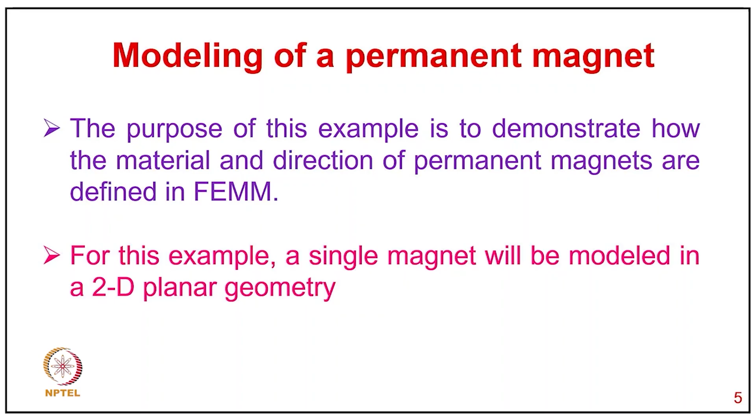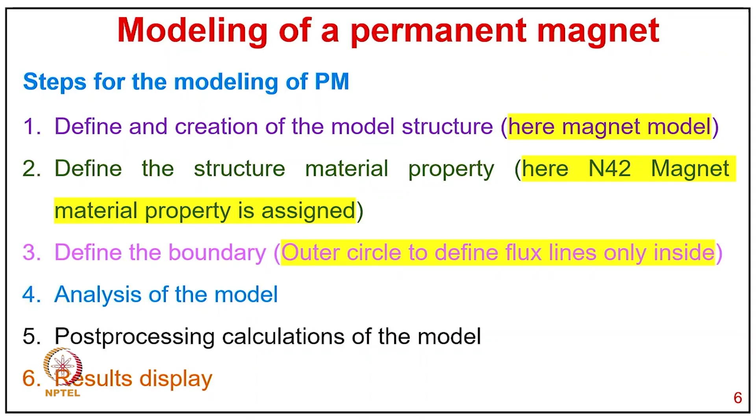Now, steps for the modeling of the magnet: define and create the model structure, here the magnet model; define the material properties, like here N42 magnet material properties assigned; define the boundary outer circle to keep flux lines only inside; analysis of the model; and post-processing calculation of the model and results display.

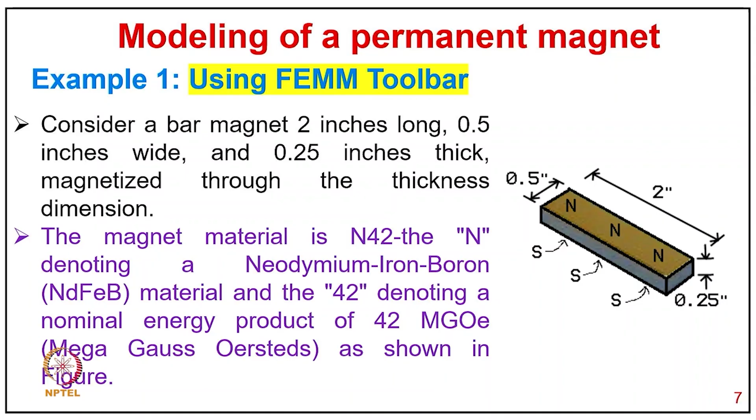So, coming to example 1, using the FEMM toolbar, consider a bar 2 inches long, 0.5 inch wide and 0.25 inch thick, as you can see in the diagram, magnetized through the thickness dimension. The magnet material is N42, N denoting neodymium iron boron, NdFeB material, and 42 denoting the nominal energy product of 42 MGOe, mega gauss oersteds, as shown in the figure.

The top side of the magnet is the N pole and the bottom side is the S pole face. The material model of most permanent magnets can be defined by knowing two quantities: the relative magnetic permeability and the coercivity of the magnet. So, now coming to modeling of a permanent magnet using the FEMM toolbox. Step 1 is problem definition, defined before defining the structure.

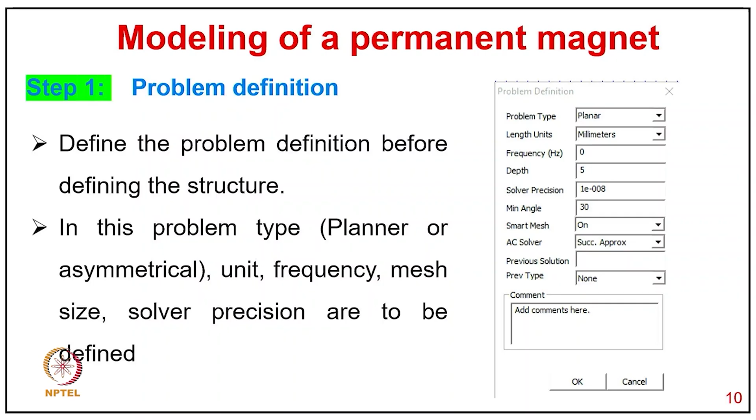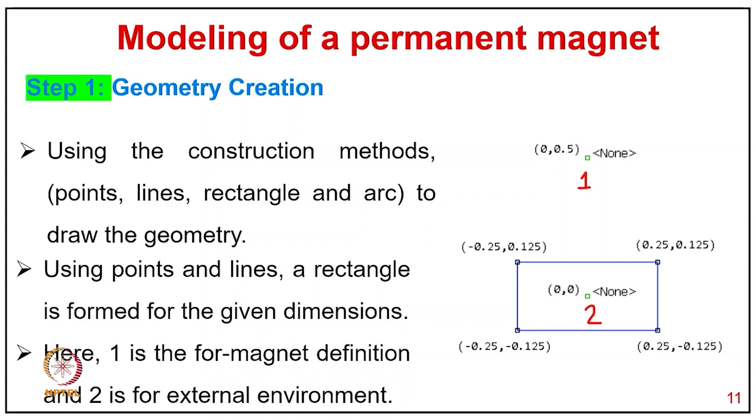In this, problem type planar or axisymmetric, unit, frequency, mesh size and solver precision are to be defined as given in the diagrams. Then step 1, geometry creation. Using the construction methods point, line, rectangle and arc to draw the geometry. As you can see in the diagram, using points and lines, a rectangle is formed for the given dimensions. Here 1 is for the magnet definition, 2 is for the external environment.

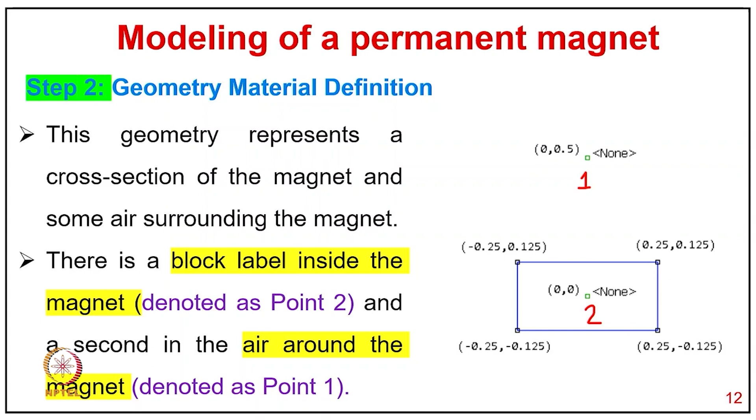So, step 2, geometry material definition. The geometry represents a cross section of the magnet and some air surrounding the magnet. There is a block label inside the magnet denoted as point 2, and the second is the air around the magnet denoted as point 1. Now, coming to part 2, geometry material definition. The material defined for the magnet is N42, as pictured in the figure.

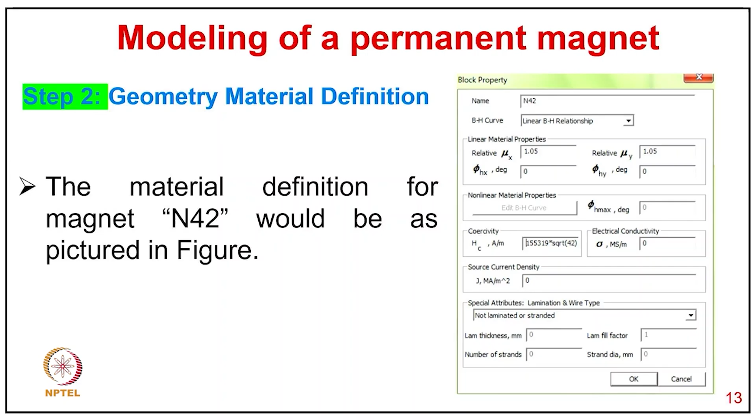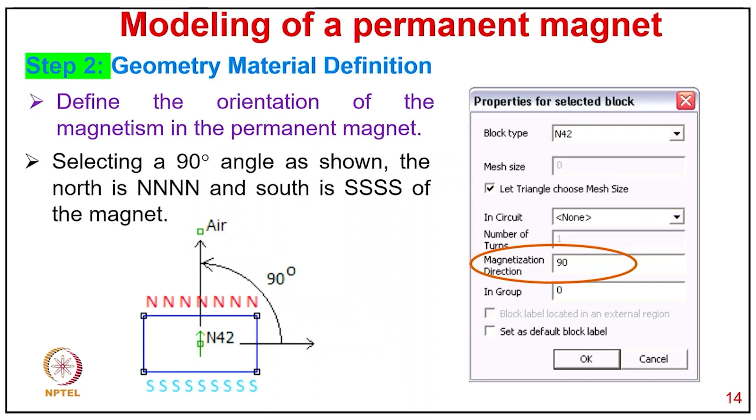Here you select N42, then linear relationship, then relative permeability mu x 1.05, then relative mu y 1.05. Similarly, you select other parameters like Hc in ampere per meter, which is given here as 155319 into square root of 42, and then you have different boxes. Now, in geometric material, define the orientation of magnetism in the permanent magnet by selecting a 90-degree angle as shown, with north NNN and south SSS of the magnet, as you can see in the figure.

Now, step 3 is the boundary definition. Define a boundary to analyze the model; the magnetic field is analyzed within the boundary, and the flux lines and flux density outside the boundary are 0. A circle is used for the boundary condition in planar problems. Now, step 4 is analysis of the model. The toolbar has the run analysis button to analyze the solution.

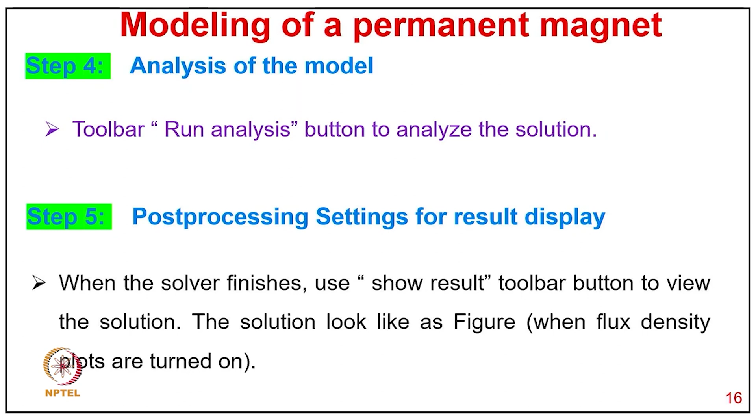Step 5, the post-processing setting and result display. When the solver finishes, use the show result toolbar button to view the solution, shown in the figure when flux density plots are turned on. And step 6 is result display. When the solver finishes, use the show result toolbar button to view the solution, as in the figure when flux density plots are turned on.

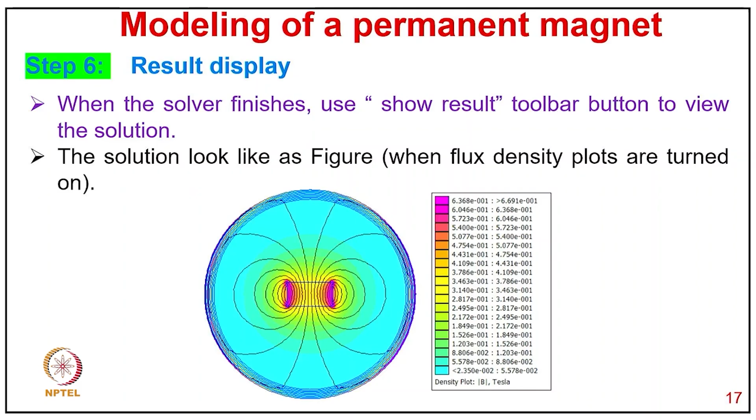So, now coming to modeling of a permanent magnet using a MATLAB script, example 2. A, model the permanent magnet shown in the figure using FEMM and MATLAB. B, plot the variation of flux density along the x-y axis of the magnet at a 0.1 millimeter gap from the magnet, as you can see in the figure.

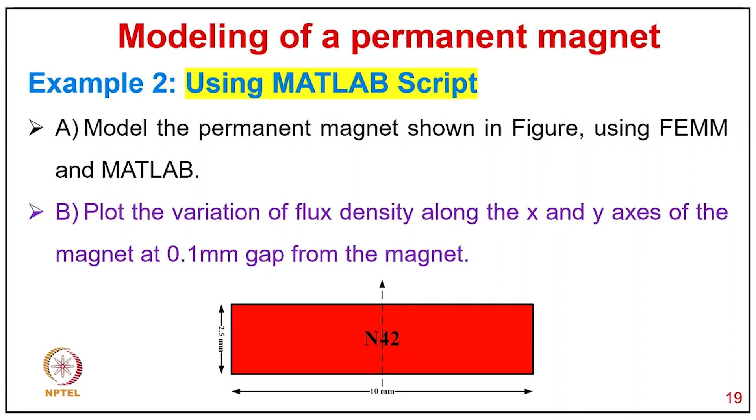Now, clc, clear, openfemm. Now, newdocument and mi_probdef: 0, millimeters, planar, and 1e-8, 0, 30, and the AC solver is not added.

So now typically using the construction methods, point, line, rectangle and arc, to draw the geometry. Here I draw a rectangle, 1,1; 11,3.5, for the magnet, and I draw an arc from 22.25, 2.25 to minus 12.25, 2.25, 180, 5 as the boundary arc, and then a second one from minus 12.25, 2.25 to 22.25, 2.25, 180, 5 as boundary arc 2, and then mi_zoomnatural.

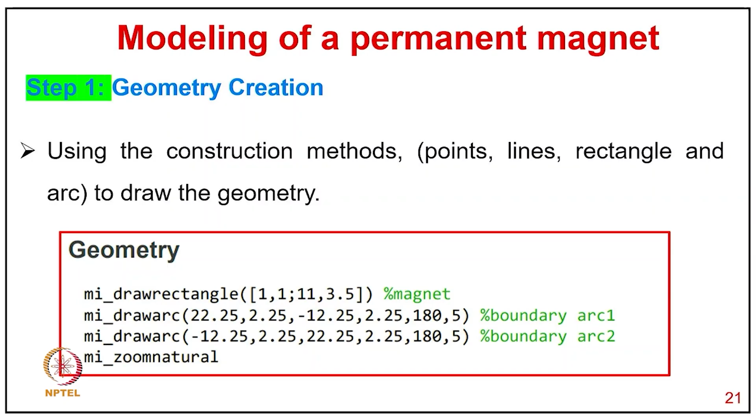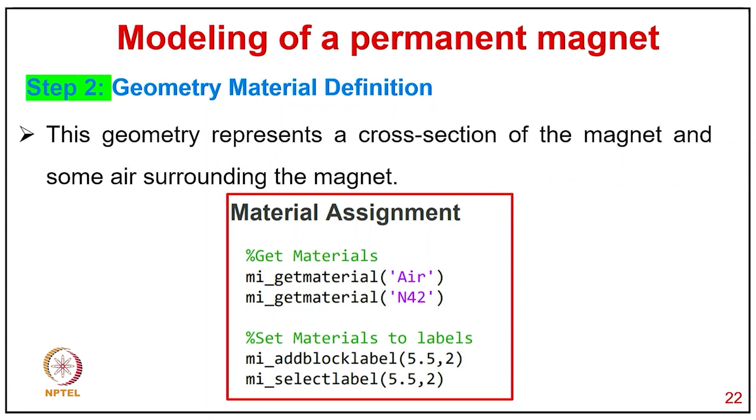So now coming to material definition. This geometry represents a cross section of the magnet and some air surrounding the magnet. So here material assignment is mi_getmaterial air and mi_getmaterial N42, and set material to label. So mi_addblocklabel 5.5, 2, mi_selectlabel 5.5, 2. Group 2 is the N42 magnet material and group 3 is the air material.

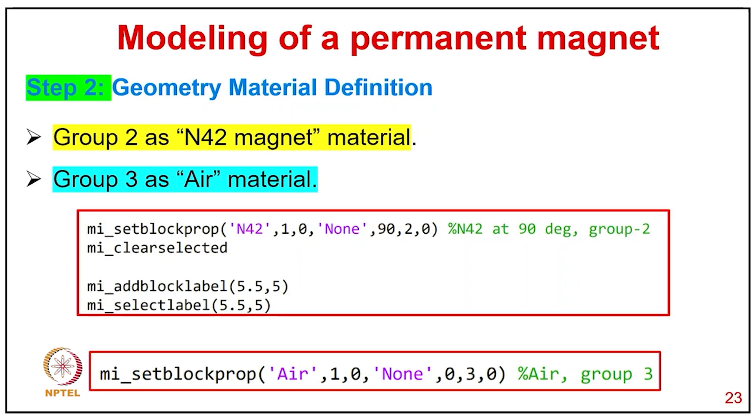Now mi_setblockprop N42, 1, 0, none, 90, 2, with the comment N42 at 90 degrees, group 2, mi_clearselected, and mi_addblocklabel 5.5, 5, mi_selectlabel 5.5, 5, and mi_setblockprop air, 1, 0, none, 0, 3, 0, with the comment air, group 3.

Now coming to step 3, boundary definition, to define a boundary to analyze the model. Magnetic flux analysis is within the boundary; the flux lines and flux density outside the boundary are 0. So the boundary assignment is mi_addboundprop air, 0, 0, 0, 0, 0, and mi_selectarcsegment 22.25, 2.25, mi_selectarcsegment minus 12.25, 2.25, and mi_setarcsegmentprop.

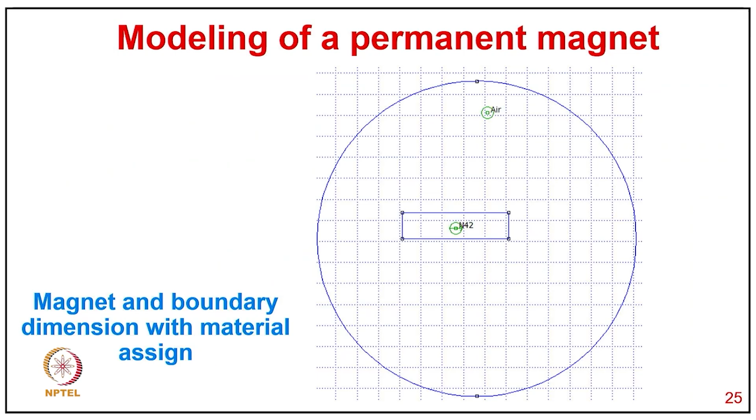So 5, air, 0, 1, and mi_clearselected, and you can see the magnet and boundary dimensions with material assignment, how the diagram looks, and then how the meshing of the structure looks.

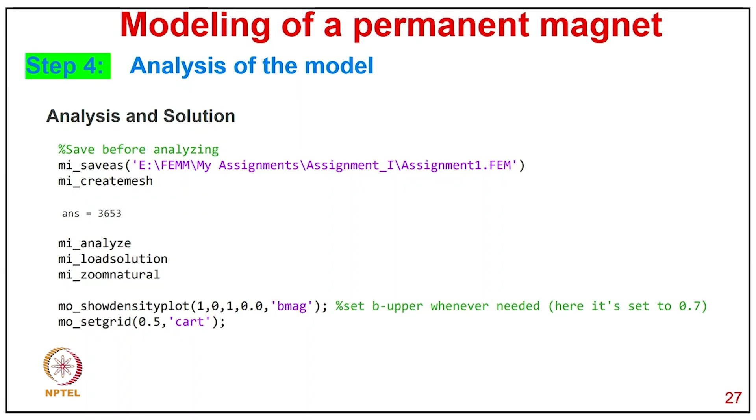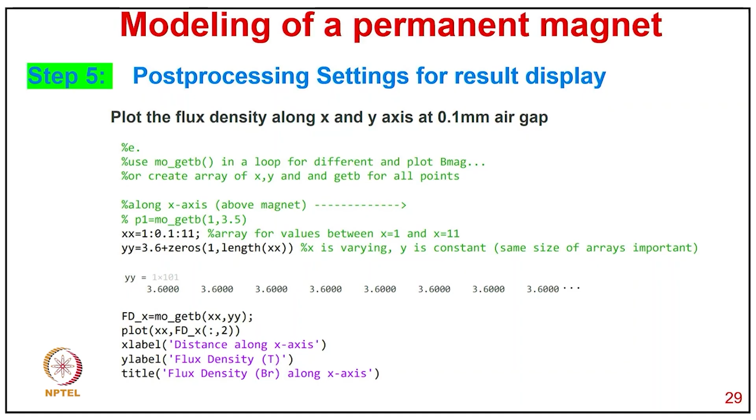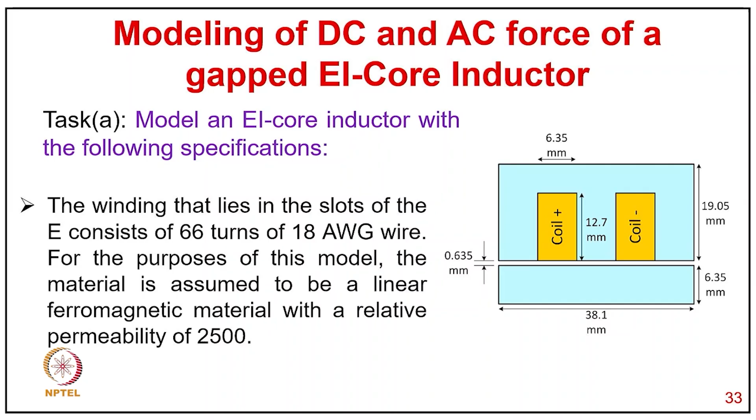Now coming to tutorial 2, DC and AC force of a gapped EI core inductor. Task A: model an EI core inductor with the following specification, as you can see in the diagram. The winding that lies in the slot of the E consists of 66 turns of 18 AWG wire. For the purposes of this model, the material is assumed to be a linear ferromagnetic material with a relative permeability of 2500. Task B is to present a table comparing calculated and simulated inductance, DC force and AC force.

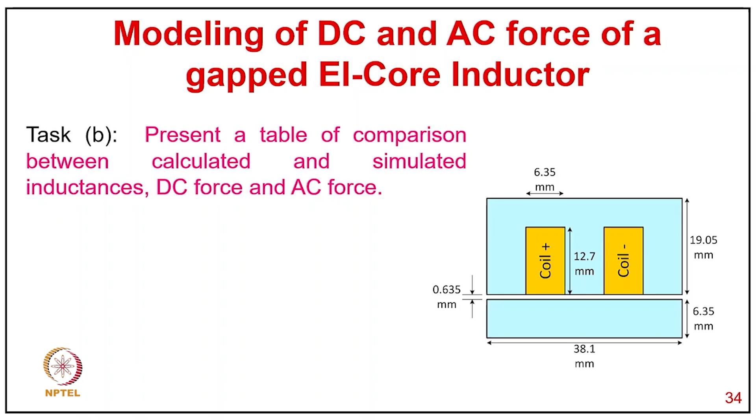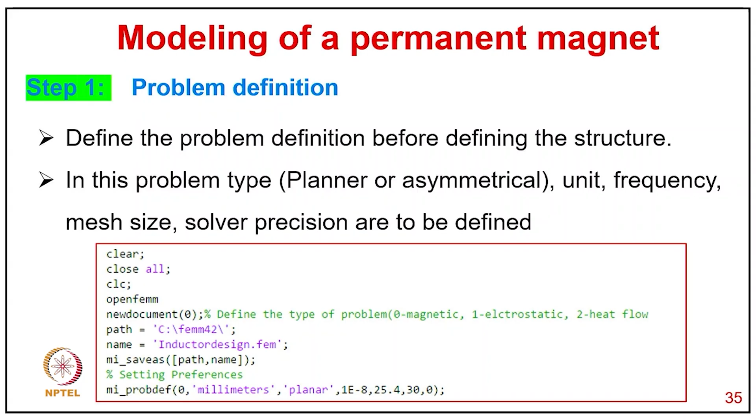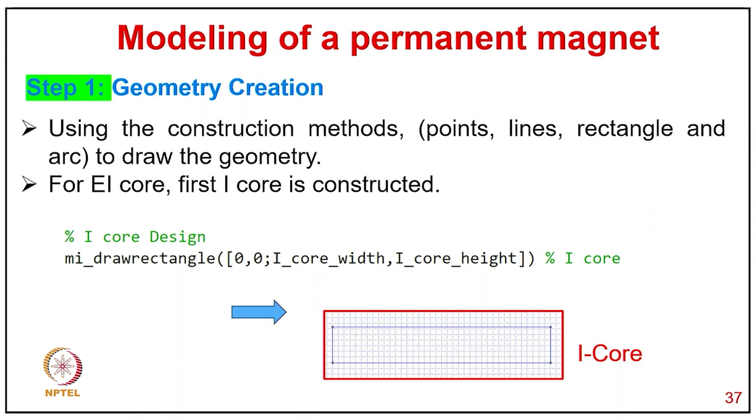And then using the construction methods, point and line, to draw the EI core. First the I core is to be constructed. You can see in the code how the I core is created here with the diagram.

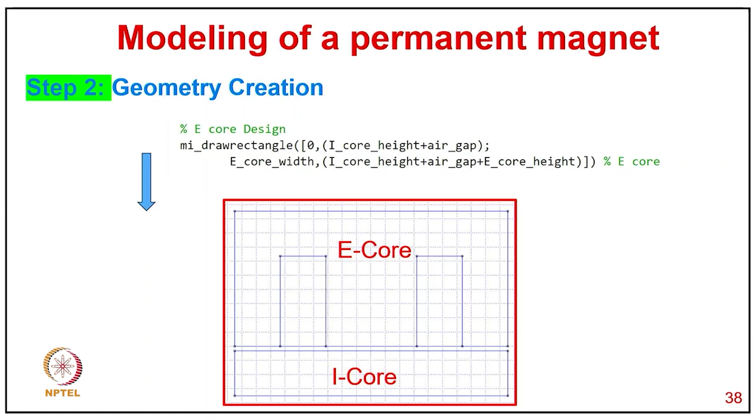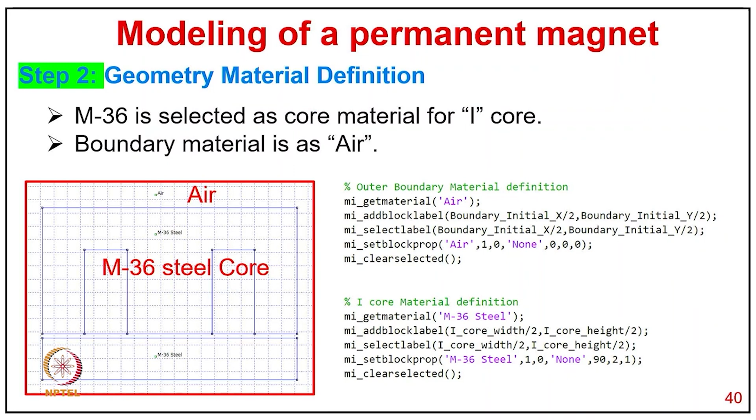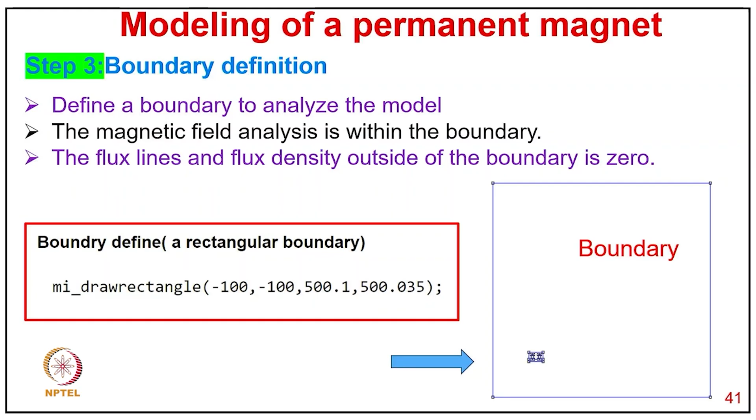So you can look into the diagram to see how it is shown, and the code is given here for doing this process. And third is the boundary definition, to define the boundary to analyze the model: the magnetic field analysis within the boundary, and the flux lines and flux density outside the boundary. So this is the boundary defined with the code, and how the boundary looks, of course, in the box.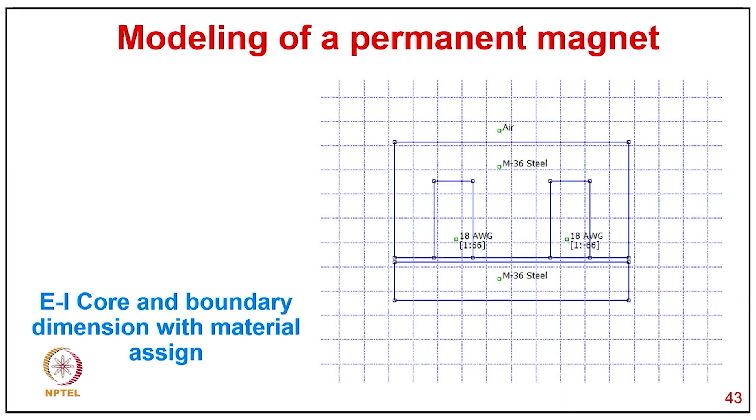And then step 3, circuit definition. Define the circuit for the excitation. So standard wire gauge 18 of 66 turns is used for excitation, and we add the circuit property. The code is given here, and you can see how coil 1 and coil 2 are shown with the geometry of the EI core. And then the EI core and boundary dimensions with the material assigned, as you can see in the diagram. And then the meshing of the structure of the EI core.

Now coming to the analytical reluctance calculation. Reluctance is equal to Lg upon 4π × 10^-7 × core depth × E core center pole width × 10^-3. Putting in the values, it comes to 3.133 × 10^6 per Weber, and L equals N² upon reluctance. So putting in the values, it comes to 1.39 millihenry.

Now coming to step 4, analyze the model. The flux linkage method calculation is the code of the model, the model and calculation of inductance using the code. And this is the code for analysis of the model, calculating inductance using field energy storage as a co-energy method for L calculation. And this is the flux lines with the leakage flux, and this is the flux density distribution. And then the inductance comes out as L equal to 1.769 millihenry.

And the results of inductance: first is the analytical calculation, 1.3 millihenry. The calculation using flux linkage FEMM is 1.796 millihenry, and the calculation using field energy comes to 1.801 millihenry.

Now coming to DC force calculation. If I assume that there is no leakage and fringing, and that the contribution of the iron sections to the reluctance of the magnetic circuit is trivial in comparison to the contribution of air, the force on the E core is described as F equal to mu 0 N² I² A divided by 4G², where A is the center pole width, N is the number of turns, I the current, and G the air gap length.

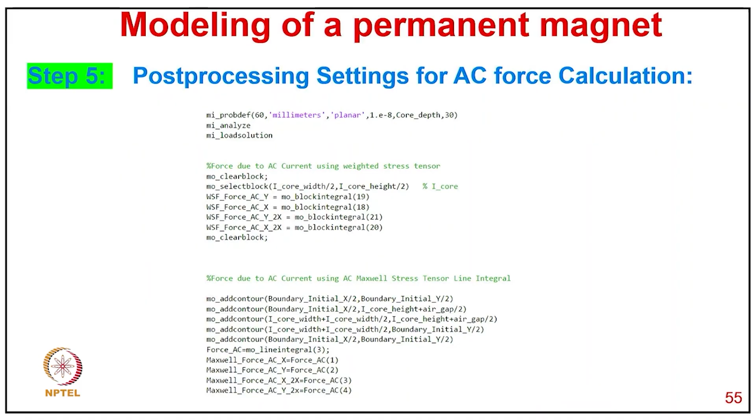So the results come as step 6. The force calculation due to the DC current: analytical calculation 1.0948 Newton. Calculation using weighted stress tensor FEMM: 1.1134 for the y-axis and 4.5342 × 10^-4 Newton in the x-axis. Calculation with Maxwell stress tensor: 1.1153 for the y-axis and minus 3.097 × 10^-4 in the x-axis.

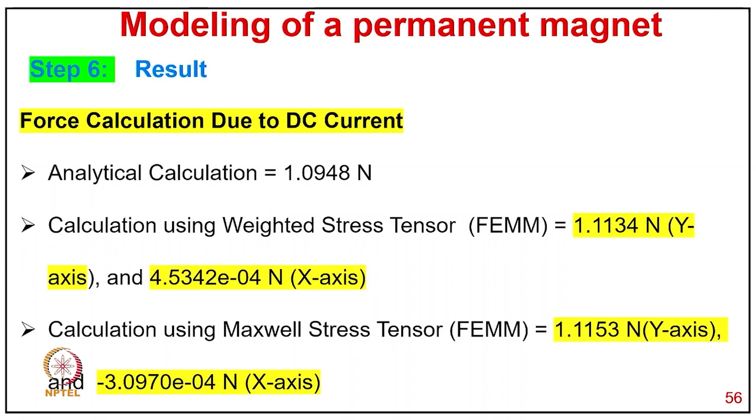Now, force calculation due to the AC current. Calculation of weighted stress tensor for the DC component is equal to 0.555 Newton for the y-axis and 2.2614 × 10^-4 Newton for the x-axis. Calculation of weighted stress tensor AC component: 0.555 minus 0.0019i Newton for the y-axis and 2.26 × 10^-4 minus 6.8119e-7 i for the x-axis.

Calculation using Maxwell stress tensor: the DC component is 0.5567 Newton in the y-axis and 3.939e-6 Newton for the x-axis. And the calculation using Maxwell stress for the AC component is equal to 0.5567 minus 0.0019i Newton in the y-axis, and 3.9392e-6 minus 4.278e-9 i Newton.